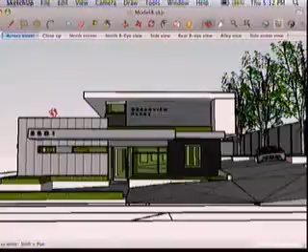The elements that I've tried to use, I wanted to go back to the 50s and the minimalist, clean look. I've picked out a lot of green products, a lot of recycled metal, and a lot of elements that would be green as part of the requirements that the owner had.

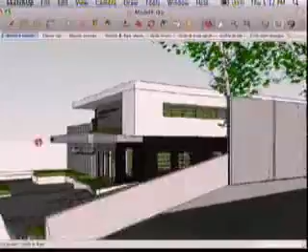We've used openable windows for natural ventilation. The clerestory that we have on this side, all the windows up here would be automatically operated so that natural ventilation will come in, and all the windows around the side will have an openable top piece that will have natural circulation there.

The exterior wall, being that it's about 2 inches off of the property line on the south side, well, we're going to.

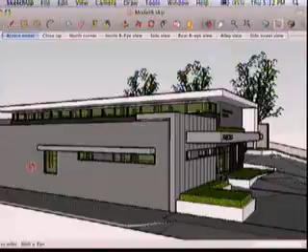Should I wrap it up or? I think you can keep going. Okay, thank you, let you finish.

Basically, what I want to do is just do a skim coat of plaster and leave it as steel trowel plaster, just leave that finish as it is and seal that. So it would have that concrete box feeling with the Rheinzink steel metal that I'm going to be wrapping the canopies with and so forth.

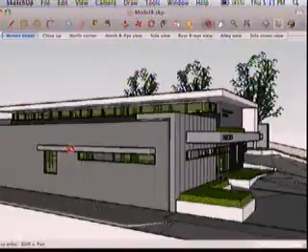There are a lot of openings here that we're filling in and trying to create some of these horizontal elements, wrapping this around. I've tried to use some louvers there to carry that horizontal effect that we have.

One thing I want to touch upon is the actual design, where the height of the building is actually lower than what it's there now—I think, if I'm not mistaken, approximately 4 feet lower than what it was before. The actual arc of the existing building, the flat portion of that roof, is going to be lower than what it was there.

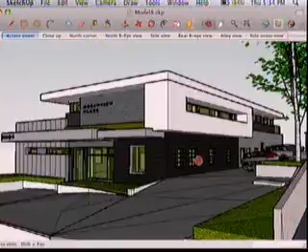Prior to this change of use, it required 18 parking spaces. Obviously, parking was a major issue. Originally, our owner was using that lot as parking spaces illegally—legally, I don't know, but it was illegal in the building code standard because it was never tied, so those parking spaces could not actually be used to accommodate this building.

We actually tried a couple of different scenarios to provide more parking, as far as going into tandem parking and different types of parking. We actually got one more parking space, but going through that created a lot more headache than it was worth, so we just went ahead and said we're going to improve that site and provide as many parking spaces as we can to accommodate the lost or grandfathered amount of parking that's given to us.

So we mitigate that as much as we can, going from a more intense use down to a less intense parking count. We're accommodating 5 parking spots from the 11 or 12 that's technically required. We do have off-site parking, obviously, but we've gone ahead and tried to mitigate that as much as possible, and that's been the best we could do.

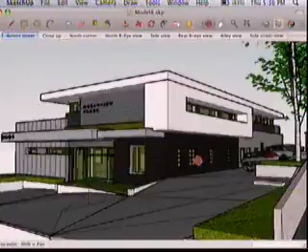There's been another issue we discussed in many meetings, including the initial meeting - the higher element that everybody was talking about. What about the second story? Well, there is going to be no second story - none in the future, none right now. And if there is going to be anything in the future, they will have to go through the permit process and provide parking for that. So that's said, and we're not providing that.

The original design, I'm not sure I recall, but originally did not provide any trash or recycle area, so we are providing that. Also, in the original design we did not have any landscaping, and one of the concerns the neighbor had was landscaping.

We hired a landscape architect, and he did a great job creating a variety of different planting. We're also listening to the neighbors, and we're going to try - emphasizing try - to go ahead and put the sycamores offside, working with Public Works to accommodate the 3 sycamores along the south side of the property.

Colors were another issue that we've kind of massaged - more earthy colors. Originally I had a bright blue and went a little crazy with the colors, but the neighbors weren't that excited. The canopy was another item that was discussed.

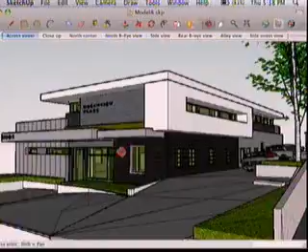One of the original schemes the neighbors saw, we were actually incorporating a similar but not the same type of canopy, angled with support and everything. After discussing with staff, which I agree with, let's not try to mimic what's there - let's come up with something new. Staff did research and found no historical significance to the building, so we're free and clear to come up with something new and different.

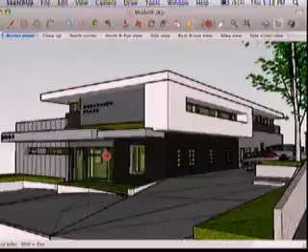The owner asked me to emphasize this also - we have been looking at and entertaining some consultants as far as incorporating solar panels, skylighting, and trying to make this building as efficient as we can. Right now we're in the midst of deciding who we go with and trying to incorporate that, but that's going to come in the future.

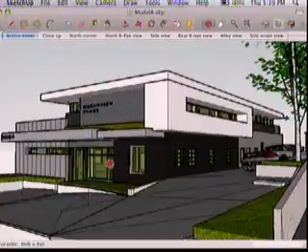If you could sum up, that would be great. Yeah, just one quick other thing - we did have structural engineers look at the design, and we've made some minor tweaks. I had a placeholder of 6 air conditioning units and smaller units, and we're going to go with 4 air conditioning units, combining the zones. There are some minor other structural elements that will not significantly affect the exterior.

Okay, thank you. Are there any questions from the board? Alan, on sheet 2.1 - looking down to the roof before we say open below, I see these columns on sheet 4.0, and I don't see the dash line.

That should appear, it just depends where you're cutting it. What's being cut is - you're cutting it from here then. Right, but these beams are there. It would be there too. We're keeping that because essentially as the entire roof is out, and all the exterior walls have been punched open, somehow the top of the roof needs to tie together.

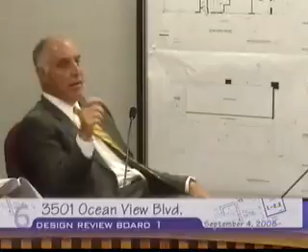Awnings that project over a public right-of-way can be approved from the Public Works Department through an encroachment permit. Would you consider this an awning? Because the way it appears to be framed is not the traditional awning of canvas or metal and rail and frame - it's actually an integral part of the structure, a canopy that projects over the public right-of-way, even though it has permanent construction aspects. I believe so, however we would need to double-check that with our Public Works Department.

Okay, Stephanie is saying yes. Well, I would defer to him. My concern is it's such an important aspect of the building to have something now become a canvas awning or just a little something - no, it's about the architecture, about these permanent blades. We do have 2 inches there to play, and it's about 14 inches of eyebrow there, or somewhere in that range.

Okay, any other questions? Actually, I was doing the calculation - for what it was there, what the roof structure was there before anything happened to it, is actually a foot higher than what's there now as a steel structure. So the steel structure as it was rebuilt is actually lower than what the existing roof was there before? Right.

Okay, because everyone's checking there, and I think that was one of the issues that had come up too. I did not get involved in the initial part of it, but I remember from the last meeting that was a big point of contention. I don't know if anybody noticed the survey, but based on the legal survey prepared prior to demolition, you have an elevation point of the actual arc of the roof.

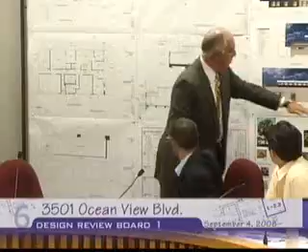So they're going to close those off, is that what you're saying? The proposed windows—1, 2, 3, 3 and a quarter, 4 and a quarter, 5 and a quarter, 5 and a half—all these are being shortened and put up high, so these are being closed off completely, and these are being shortened up. That's clear, we'll keep to this elevation.

Our landscape architect, a member of our board at Sparr Heights, had a concern about the plants along the sidewalk. They've got barrel cactus proposed, and I think other cacti too, which maybe isn't such a good idea along a sidewalk. There's no record of that here. Okay.

In their landscape design that they presented to us, well, they must have changed it, because I don't see anything on the sidewalk, or parkway, I should say, that shows that.

My last issue would be the wall between the two properties. Currently, my recollection is it's a retaining wall roughly 24 inches high. They came in when they started construction and put in a chain link fence, actually canvas tarps, and I believe that's what's there now, but that's after they started the project. The original wall is maybe 2.5 feet high, and at the top is the driveway for Ken Daniels, and at the bottom is the driveway for this property. So there's no actual wall between them, just a retaining wall level with the property line just north of this property. They want to put in a 10-foot wall.

The design up there looks like it's going to be 10 feet from the top of the retaining wall. We had spoken with them, and they did make some concessions as far as lowering the wall at the front of the property so Ken Daniels' signage would be visible from Ocean View. But to have a 10-foot wall on top of that little retaining wall doesn't fit anywhere in Sparr Heights. It's just too much.

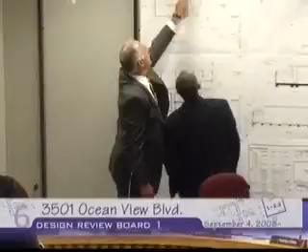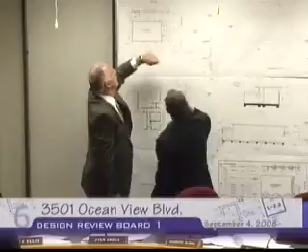It's over here, from here to here, this is a 10-foot high wall. Where's the document? Right here, 10-foot high. And this is a 42-inch high wall. This probably has to do with sight lines and stuff. But 10 foot high from their grade, from their parking, from their side -- that means it's probably 8. Even if it's 10 foot from their property side, that's still an 8-foot high wall. There's no 8-foot high walls in our area.

Okay, I'm sure they can explain, we'll ask them. That's all I have. Thank you. Were there any questions for the gentleman? No? Okay, rebuttal.

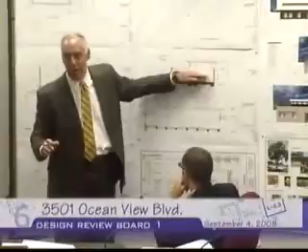My concern is, here's my concern. My concern is that, design-wise, this interstitial space has the potential to be utilized later. It's a very heavily structured member, and the potential is later on it may impact the usage and the overall impact on design. I'm more comfortable figuring out engineering some way to not retain that horizontal member. I would prefer to have that completely gone and have clear storage all the way up to the underside of the roof. So for me, that would be a design element that I think would be very important to not have in this building.

And then in closing, I can't say how good I think the design is. I think there'll be less traffic, which I think the neighborhood wants, potential less traffic. Traffic is different than parking. It hasn't solved the parking issue. I don't think it can be solved. It's an existing building, existing site that required less parking before, but I believe this usage will be less traffic, less noise than the previous use would have brought to the neighborhood.

Perhaps that's an issue with the design, but I think the design is less traffic to the site. I was looking at the vertical height. I think that the vertical height, obviously taller than before, but successfully breaks it with these horizontal bands, utilizing the downslope. I think it works perfectly to have a building that's that height. The horizontal soffits, I think, are nice and thick. And I think that this project is really going to be a great addition to this community, to this neighborhood, and bringing in a new architectural approach to a neighborhood that is tired. We want to renovate these older buildings. I think this is a terrific approach. So aside from that horizontal structure and design, I'm all for this project.

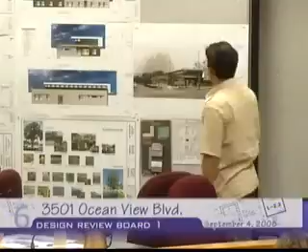Another thing is this piece right here just seems really bulky to me. And looking at it at this angle, it kind of heightens that bulk. So maybe look into taking that back a little bit, because I know you have these windows here that are north facing with a really deep recess that's kind of strange.

But I know it's created because you're basically coming to the corner and you need a certain depth here and a certain depth here, as it comes together, but maybe lighten that up a little bit. It looks a little heavy, especially for that corner as you enter into that parking space area.

But other than that, the windows are very clean, the massing is clean, the distinction between the materials is very clean, and so besides that, I'm also ready to approve it as is.

Great, thank you. I'm going to echo the same comments. I won't dwell on the parking as well. I share the same concerns, but it's really beyond our control at this point.

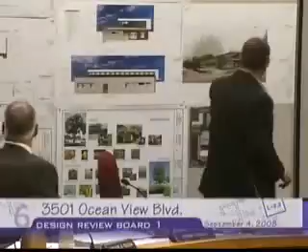So I'll comment on the design, Mr. Malakian. It's a wonderful job. I think this building will complement the building across the way very well. There's a really nice building in this area here, a beautiful white building, sort of has more of a Richard Neutra aesthetic. And I think the fact that you've introduced this white element, this sort of dog-leg shape, complements that building.

Because that language occurs across the way. So for me, I live in the area, in Montrose, and driving by here and seeing these two buildings having a dialogue with each other, it starts to indicate that this is kind of a gateway into the residential community beyond. And I find it to be really an amenity that was needed.

You know, even the older building didn't quite match up. The original, which had that sort of aesthetic, which has been transformed, I think this really makes that corner a lot more attractive, a lot more pleasant. And, you know, all these code issues and things you had to live with, the parking, one of them, I think if we don't do anything about this corner, we're going to have this eyesore there for years to come, and nobody wants that.

So I really welcome this project, and I believe it will be successful. I think with respect to future, whether the applicant intends to put more use, more people in the building, I think we have to leave that up to building and safety to make sure they catch that, and if there's some kind of agreement where if that occurs, it has to go through the normal process, because certainly we would not want this building to be overpowered with usage and require more parking on the street.

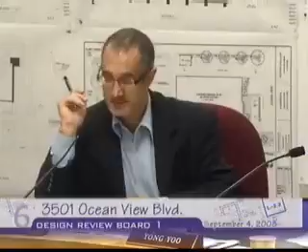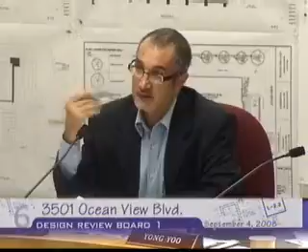I do think that if you are going to do solar panels, you need to come to terms with it now, not later, because solar panels require an angle to get optimum usage out of them. With a scheme like this, if you put an angle on those panels, it will throw your design off. So you may have to live with panels that are completely flat, which you could do here. It won't be optimal, but you can still get some use out of it. I strongly encourage that if you do panels, that someday the owner doesn't come back with sawtooth shapes on the roof, which I think will destroy what you're trying to achieve here.

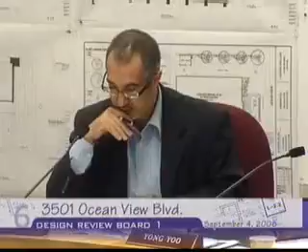The wall between the mechanics structure to the north and the parking, I think if you could consider lowering it even a foot, I understand what you're trying to do, but you might want to work with the neighbors, and even the planning department may want to look at that. From the rendering it looks great, but at 8 feet it might feel a little high. You do have landscaping that mitigates that height. There are a lot of cars parked in that driveway when the service place is open, so it's a situation where you're trying to screen, because the use of this building is quite different. So I'm going to leave that up to you and the planning department to come to an understanding that's satisfactory to the neighbors.

Let's see, I don't think I left anything out. I think that's basically it.

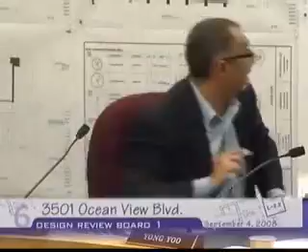I understand completely what you're trying to do, and the materials are wonderful, and the forms you created, the way it steps. The nice thing about this is that it has a natural stepping from the lower point to the other point, whereas if all of this was brought on the other side, it would have been problematic. You also have the same thing happening from the alley, so it steps in from the alley because there is a house there. I think you've been very sensitive to all these things, and I really appreciate that.

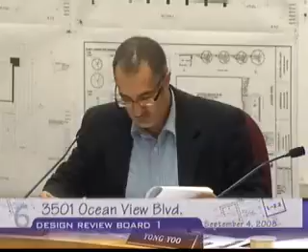So with that said, I also support the project. I just have one concern.

I missed that one. All right, we'll work with these, I got you. Okay, well, make a motion, if there's someone that can make a motion.

I'd like to make a motion to approve, with the only condition that, for architectural reasons, the horizontal beams in this section between these horizontal beams be removed. Is that a consideration or a requirement? Condition. Condition, okay. All right, very good.

I'd second that. Also, if the board wishes to have the fence reduced in height, perhaps the board would like to specify exactly or approximately how much to reduce it, rather than relying on 'to the satisfaction of the neighbor,' because that puts planning staff in a very precarious situation. I could live with 7 feet. I don't know how the board feels about that. Okay, we can add that. All right, so would that be amending your motion as well? Yeah, we can do that.

7 feet from whose side? From their side, from the applicant side, from grade. So we have two specific conditions: one is to remove the horizontal structural beams, and the second is to lower the height of the wall to 7 feet from the south side, the subject property side.